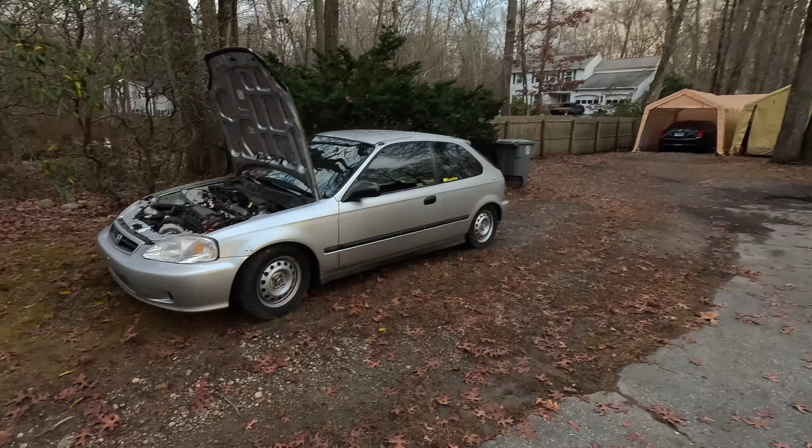Now that we've gotten through the intro, I want to give you guys a quick rundown on what this car is, just in case you're new to the channel. So this is a 1999 Honda Civic that we picked up a few months back for $500. Once we picked this thing up, we instantly went to work on modifying it. So when we first got it, it was an automatic car, and someone had already swapped in a JDM D15B non-VTEC. So we had to get rid of the automatic transmission.

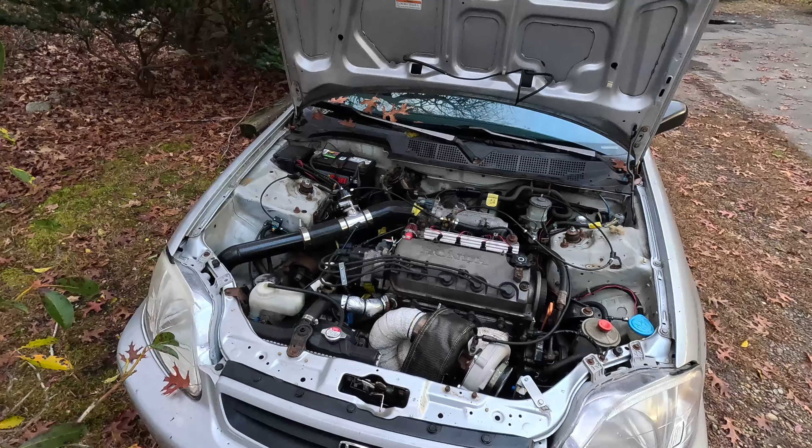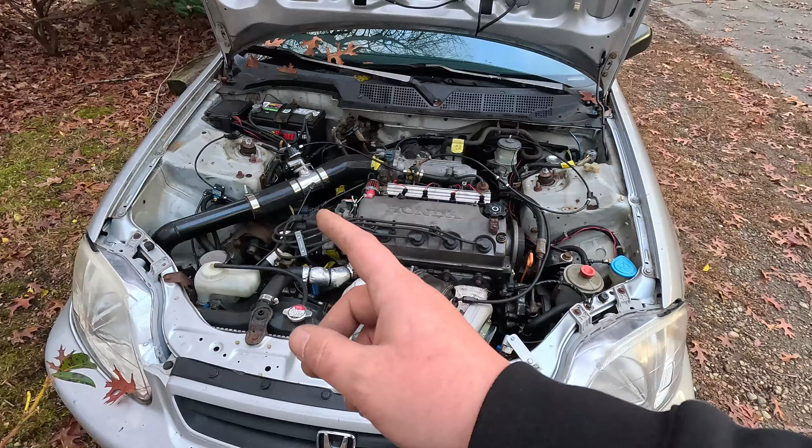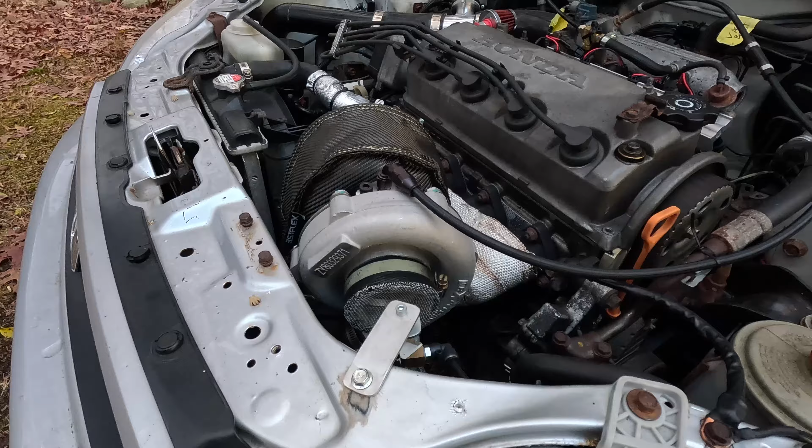So we did a manual swap, then got this thing on Hondata S300, and then proceeded to build the cheapest possible turbo kit that I could put together using leftover 2.5-inch pipe that we just had laying around and whatever else I could scrounge together, including an eBay blow-off valve, Amazon wastegate, and a Maxpeedingrods billet wheel T04E turbo with an eBay manifold. And it's been working out really good for us. I've been super happy with it. It's been a strong little combo.

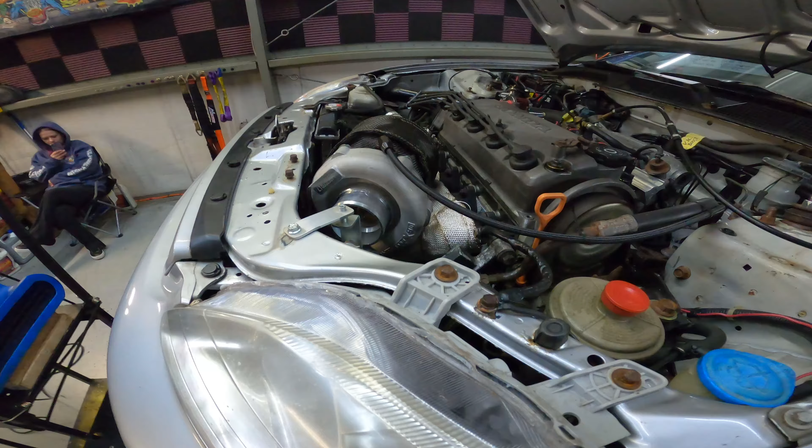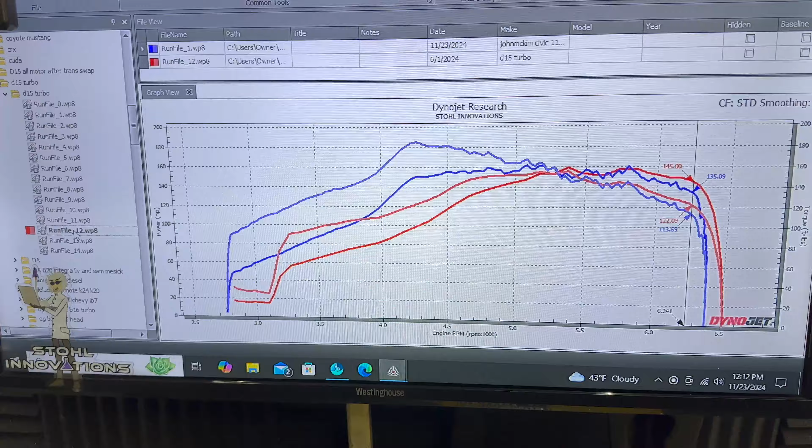So as you guys just saw, we made a couple runs, the first runs on the file that I had in the car that I've been street driving it on, and the boost definitely comes up quicker. Let me flip this thing around and I'll show you guys the graph compared to the last time we were here. So as you guys can see, this is the latest run, and playing with quick spool definitely helped because everything's coming up a lot quicker. It's getting on boost faster.

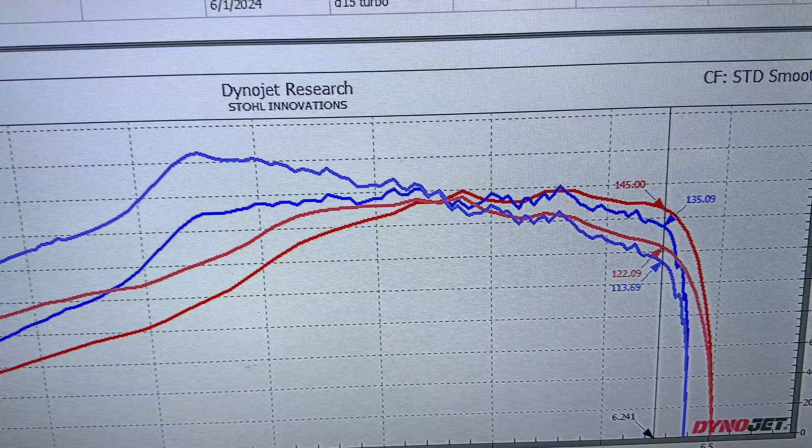But you can see right about here, this thing goes all crazy on us, and we're trying to figure out what that is. We're thinking it's ignition related, but we're not 100% sure yet. So he's checking some plugs. We found one that looked a little bit weird. So we're gonna investigate a little further and see if we can find anything.

So as you guys just saw, we made another run after checking the plugs. They looked all right, but we're still having that same issue where it's breaking up, or at least it looks like it's breaking up. The car feels fine, but the dyno's showing something different. So let me flip you guys around here again and we'll take a look at it.

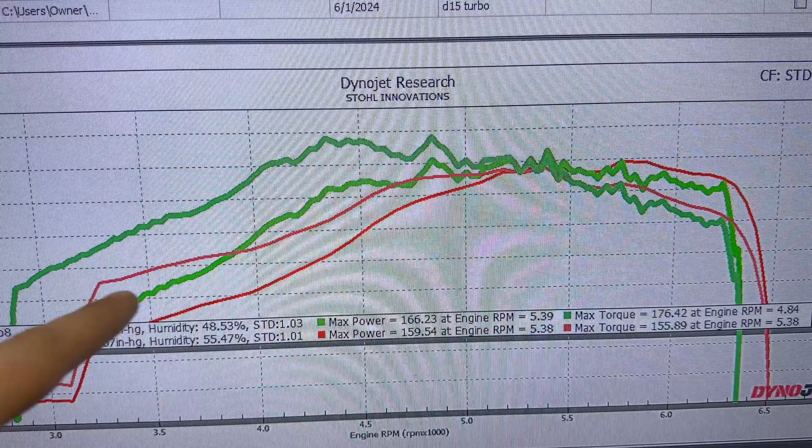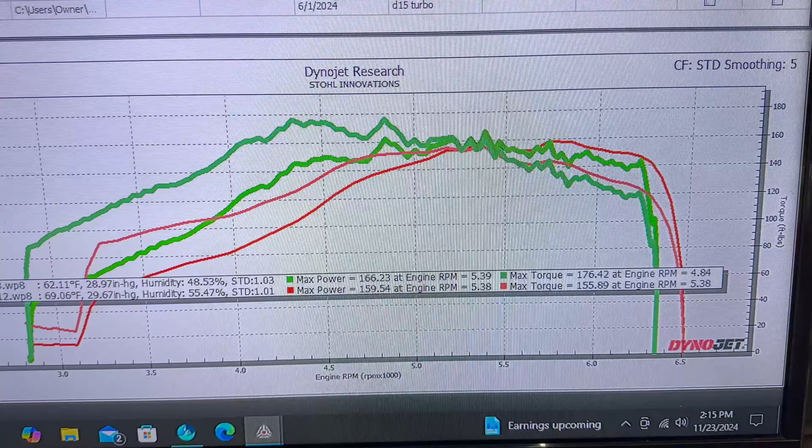As you guys can see, we've got two runs pulled up here. The red one is a previous one we did way back when, and the other one is from today. And you can see it comes up and then it gets super choppy. So we might throw a set of plugs in this thing and hopefully try to correct this, but we're still not 100% sure what's causing it. So we're working through the issue right now, trying to figure out what the problem is, and then hopefully we can throw some more boost at it.

So before we throw plugs in this, we want to try one other thing. We can't remember if way back when we were running this car, if we were running it in second gear. So we're going to go ahead and throw it in second, see if it makes a difference. Not exactly sure why it would, but we're going to give it a shot because I think that's where we were running it last time. So we'll go ahead, fire this thing back up and try it again.

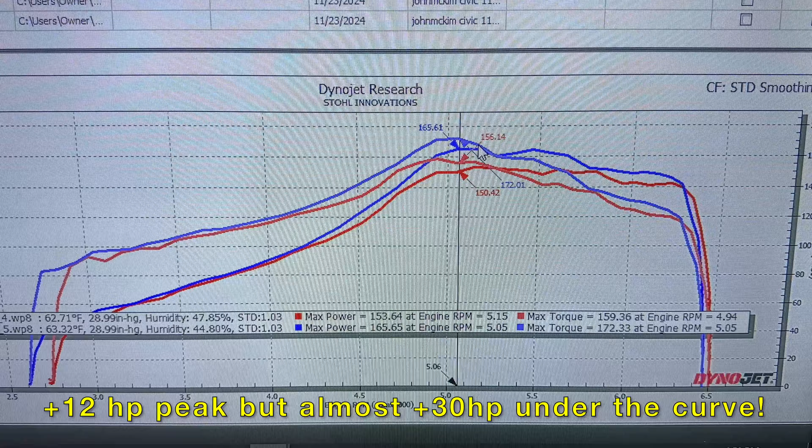As you guys can see looking at the graph, now that we have some smooth ones to work with, between the last time we were here and now, we did pick up right around 12 foot-pounds of torque and 12 horsepower from using the methanol and also using quick spool. So it's kind of cool to see it playing a role. So now that we've got a baseline set up, let's go ahead and up the duty cycle a little bit.

So we just made another rip with putting the quick spool up to about 13 pounds, and then we went with the duty cycle up to 68. So we're making a lot more power. It's making almost 30 horsepower and 30 foot-pounds more. So this thing definitely feels a lot more lively and it seems a lot happier.

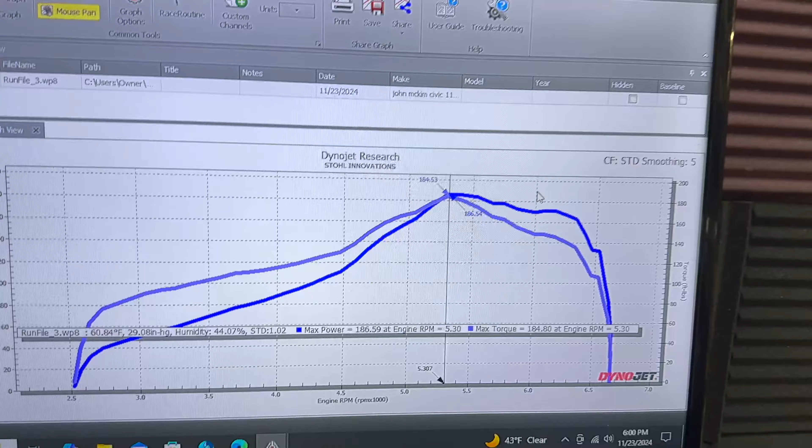I'll flip you guys around real quick so you can see the graph. We're now making 184 and 186, so it definitely woke it right up. And that is at right around 16 pounds way out here at the end. So it's definitely a lot happier. We have a little spike there, but I think that's just where this engine wants to make peak power, and then it's starting to taper off.